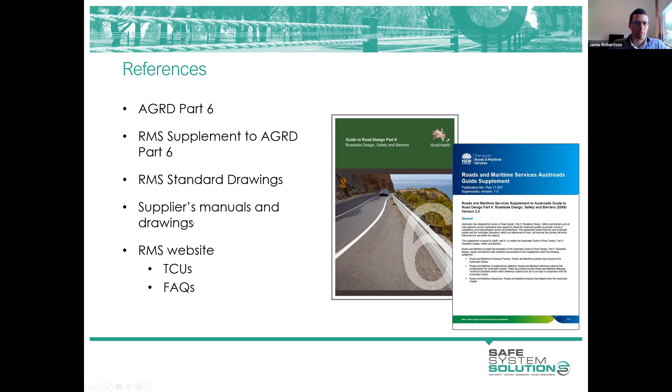Before we start designing a barrier, we really want to think about what is it intended to do? That really narrows down the suite of products that we have to choose from. Is it at the roadside or in a median where we're interested in preventing head-on crashes, at a bridge perhaps, or maybe it's at a work site where we're primarily concerned about the safety of the workers behind rather than the occupants of those errant vehicles.

On a windy motorcycle friendly route, you might see a barrier like this with some motorcycle add-ons, and Ken will talk to you about these type of things in a little while. You might see a wire rope barrier at the roadside, as you can see there.

In the median, we need a barrier that can be struck safely from both sides, so wire rope is a popular choice. You might have a back-to-back guard fence installation there. We have a G4 or similar - it might be a flexible W-beam back-to-back system.

On a high volume, high speed road with a lot of trucks like this urban freeway, we might use concrete. Now, it's the least forgiving system we have, but in a relatively constrained environment like this, where impact angles are likely to be low, it's a good option. And we really are concerned about what might happen if a larger vehicle did penetrate a median barrier due to the high volumes at this location.

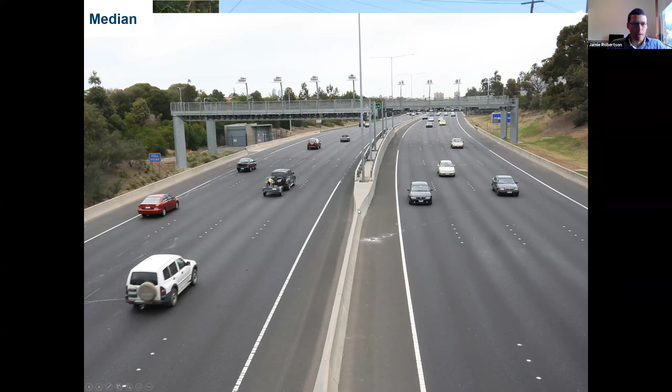So what is our barrier doing? What's its purpose? That helps us make some decisions around the product that we choose. And Evan took you through the list of accepted products last module, and it is constantly evolving - it's undergone quite some change in the last little while with the transition to MASH.

With our longitudinal barriers, we class them as rigid, semi-rigid, or flexible. Every barrier has an end treatment. It might be an end terminal, like a guard fence end treatment. It might be a crash cushion or impact attenuator that we might use at the end of a concrete barrier, for instance, or a bridge pier. We might have a point protector, like the Raptor crash cushion that we've seen, particularly useful in highly constrained locations where we don't have the space for a longitudinal system.

Our installation might be permanent or temporary, so we have products classified as permanent and others classified as temporary. Any installation might be of a permanent nature or a temporary nature. So it is even sometimes the case that we might use a permanent barrier in a temporary situation. We might have a temporary transition or traffic switch as part of some roadworks that's going to be in place for a year or two. So it's a temporary situation, I suppose, but we sometimes make the decision to use permanent systems.

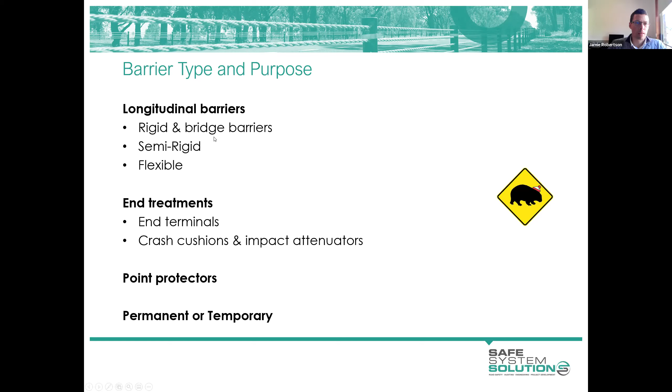Rigid barriers are the least forgiving system in terms of risk to vehicle occupants. You can see there some examples on bridges where we've got concrete barriers. We are concerned about what will happen if a heavy vehicle does penetrate that barrier and ends up below, perhaps on a roadway, a rail line, or in a stream. So the secondary consequence is often of greater concern than that single vehicle run-off road crash.

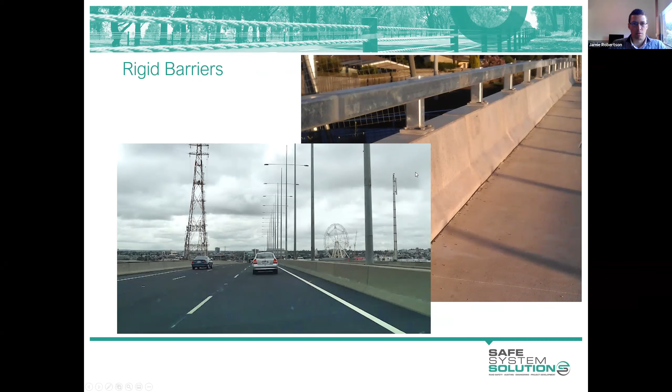They deflect by very little, next to none. They're massive lumps of concrete, often anchored to a structure, so they deflect by next to nothing. As a result, they don't incur much damage when struck. That's a good and bad thing.

It's great in terms of maintenance. They rarely require maintenance intervention, and therefore their ongoing cost is low. But if and when they are struck by smaller vehicles, there is a greater risk of injury to those vehicle occupants. Because of that, we need to be mindful of where we locate rigid barriers, not at locations where we might expect an impact at a relatively high angle. So perhaps off the back of a curve, we need to be conscious of the distance from the edge of the road that a rigid barrier might be located.

So as we're not opening up that possibility for larger impact angles. Another benefit is that they can and do contain larger vehicles, and they can be engineered to contain as large a vehicle as you would like.

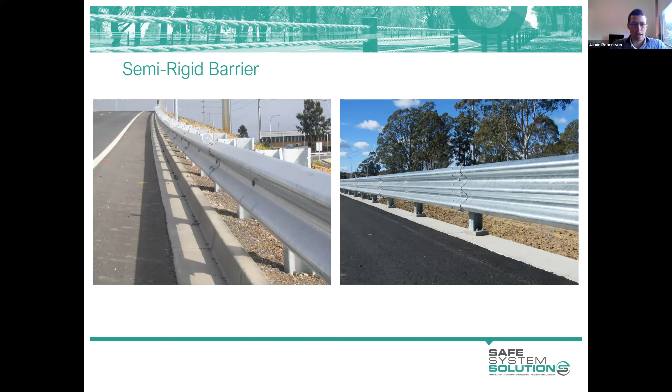Stepping down in terms of rigidity, we have the semi-rigid category. G4 on the left, Thrie-beam on the right. Now I'll note that both G4 and the public domain Thrie-beam products are now legacy. There are some proprietary Thrie-beam products that are accepted for use.

Semi-rigid systems deflect by a relatively small amount. Because of that deflection, they have some sort of cushioning effect on the occupants of the errant vehicle, so they're more forgiving than rigid systems in that regard. They usually remain serviceable after an impact. They will incur some damage, but not enough that they are rendered ineffective for a subsequent impact. You can transition a semi-rigid barrier directly to a rigid system, so that's a great thing on a bridge approach.

They are more easily applied in constrained locations, particularly in comparison to wire rope systems. They can be curved relatively tightly. Their minimum length requirements are less prohibitive than some other systems.

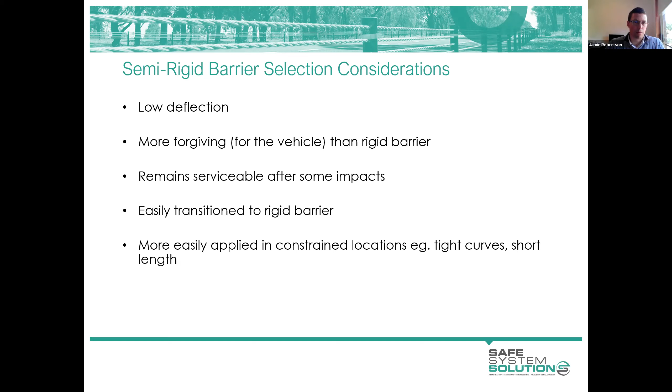The newer cousin of wire rope is the flexible W-beam barrier, which at first glance looks very similar to a semi-rigid barrier, but the notable difference is that there isn't a block between the post and the rail. And of course our posts are relatively weak, so the system performs largely by the tension developed in the system rather than the resistance provided by the posts.

Flexible systems deflect by a fair amount. As a result, they are forgiving on the occupants of the errant vehicles. Wire rope is the best in that regard, but the flexible W-beam systems aren't far behind. The barrier may be rendered ineffective by a single impact, and that particularly applies to wire rope systems. A significant length of barrier can be damaged when a wire rope is struck.

You might be talking in the order of 50, 80 metres, something like that. The cables will lose tension, perhaps even be lying on the ground. So we can't be sure, or it's even unlikely, that another impact in the same location the vehicle would be contained. Wire rope is difficult to apply in constrained situations, horizontal curves, or short lengths between driveways, for instance.

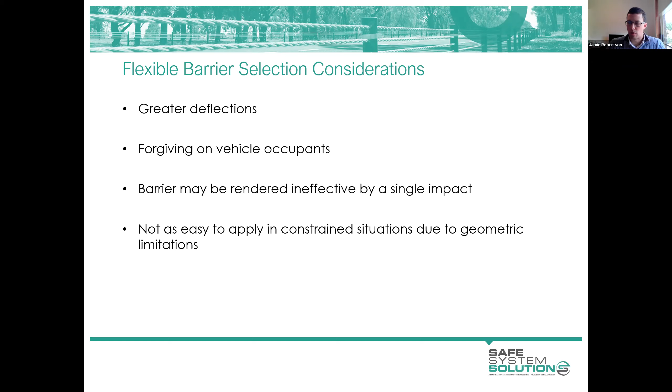And a few quotes here from some of the relevant guides around design and choice of barrier systems. Part 6 does say that a barrier should only be installed when the barrier reduces the risk associated with the roadside. Comments along those lines used to be a much bigger feature of that part. It's generally now accepted that a barrier, and particularly a flexible one, provides a better safety outcome than not providing one. That said, there are some design things that we need to do to ensure that we don't introduce a risk to road users when we install a barrier.

AASHTO talks about whole of life cost, and that the best solution is the one with the lowest whole of life cost.

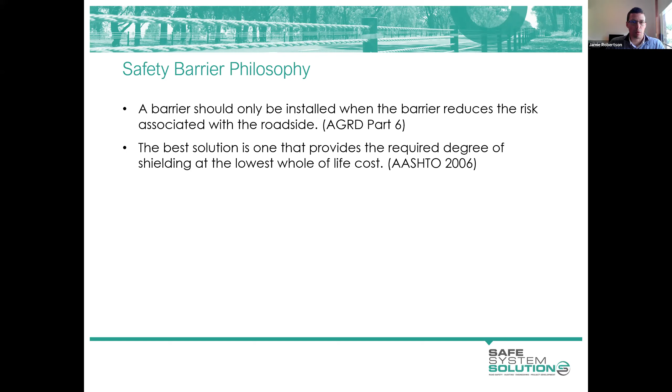There's been a lot of work done in Victoria around comparing the different flexible systems in terms of whole of life cost, and that is one big attraction of the flexible W-beam products over wire rope, because they don't require that maintenance intervention every time they're struck.

The general philosophy is to accept the most flexible system you can, subject to the constraints at the site. So there the hierarchy would be wire rope, then your flexible W-beam products, semi-rigid and rigid.

When you're thinking about the decision to install a barrier and your barrier type, there are a few key things to keep in mind. Think about the speeds at your site. That will influence whether you need a barrier at all.

We know in high-speed environments that the entire roadside area is of interest, and there is benefit in shielding roadsides continuously, even where there are no fixed hazards present. In a lower speed environment, a barrier may not be required or provide any great safety benefit.

What is the consequence of barrier penetration? Is our worst case scenario just that single vehicle run-off road crash, or is there a secondary consequence that we need to be aware of? And if there is, this is where we typically beef up our containment level and go with a more rigid system.

And know the ins and outs, the pros and cons of the different systems, the different categories of systems, and even the individual products within those categories to help you make informed choices.

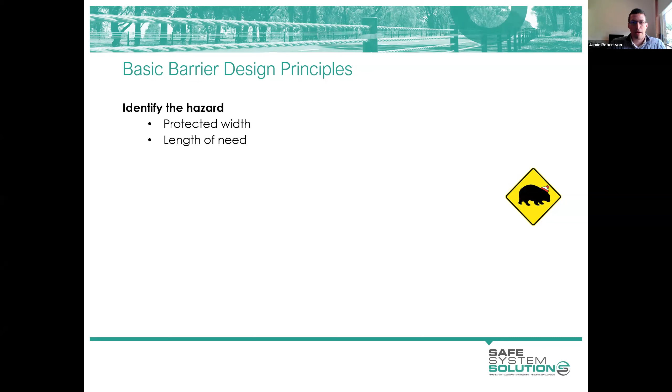Length of need is the term that we use to describe how long a barrier needs to be to shield a particular hazard.

We need to locate our barrier in relation to the edge of the road. We need to be mindful of our traffic lane arrangement, our existing and desirable shoulder widths and verge widths. Is there a kerb in play that might influence the lateral offset of our barrier from the edge of the road?

Is our batter one that warrants shielding in its own right? Is it flat enough that we can install the barrier on that batter? We need to think about run out areas, and I'll explain that concept a little later. That might influence where we start and end a particular barrier.

And we need to think about how we might transition to other barrier types. There might be existing barriers on a site that we need to match up to, or other barriers of a different type proposed as part of the same project. It might be that we have a structure that warrants a high containment level barrier, and we need to either connect directly to that barrier or overlap in some way.

So it's often the case that we'll go into a barrier design with a preference for a system. And I do encourage you to think flexible first, but through experience, you'll identify that flexible systems are often difficult to achieve. So it's quite an iterative process.

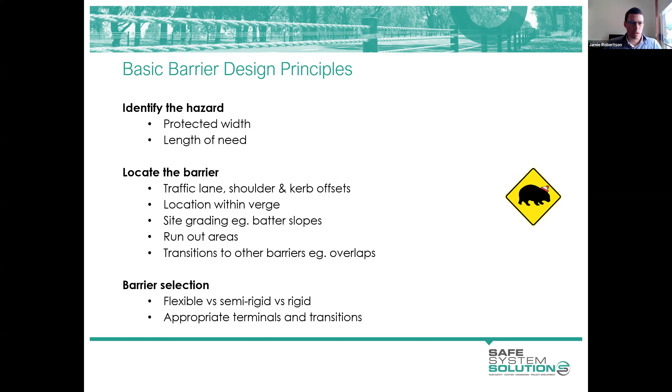There are two distinct scenarios in barrier design. The first is a new roadworks project, a new piece of road, or a roadway where there's some other works happening, and we have the benefit, therefore, of survey and other design information.

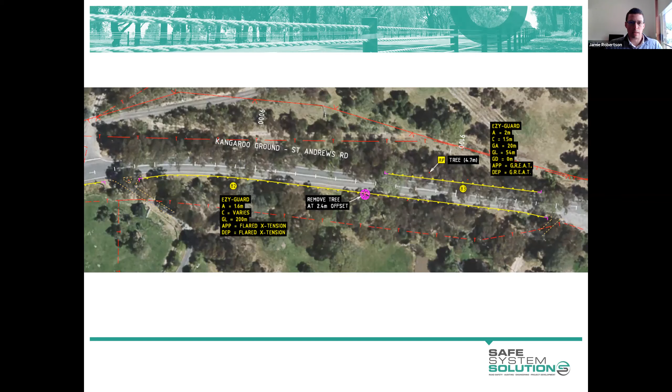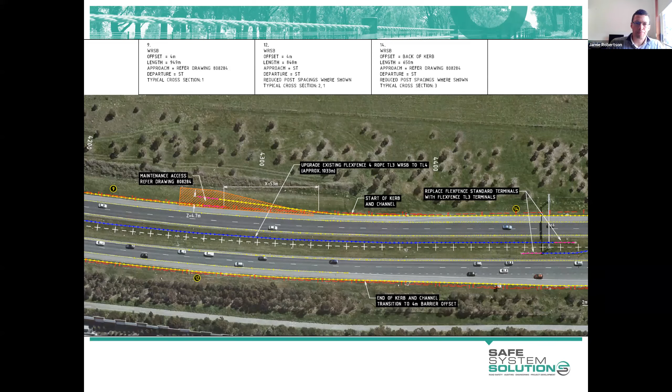Speeds influence our length of need. We typically find that at higher speeds, vehicles will depart the road, or may depart the road, at particularly shallow angles and reach hazards located a long way from the road. Flaring of barriers can influence their length of need, as can the road geometry - we treat straights and curved sections differently.

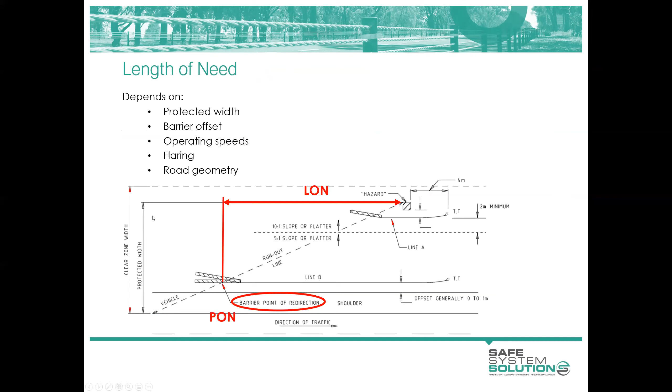All right, so here we have our vehicle run-out line, which on a straight piece of road, we construct at a particular angle from the direction of traffic. Our angle here is to be taken from the Austroads guide. We choose the appropriate angle of departure based on our speeds.

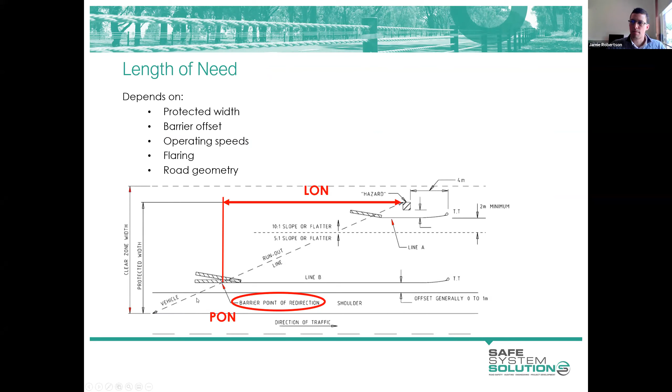In states that don't use the angle of departure method, the question always comes up: what's the magic angle? There is none—we have to explain this complicated run-out length method. So I do like the angle of departure method. It does, however, result in some particularly long lengths of barrier.

And I'll point out as well, it does result in a barrier that provides just as much length for the opposing direction as it does for the adjacent direction, as opposed to other methods which result in relatively short lengths on that opposing side. So despite what this drawing looks like, it looks like we have different angles here and here—these angles are the same, and your barrier is basically a mirror image on the approach and departure sides.

This is for a two-way situation on a straight road. If we had a one-way roadway, we need to provide that same length of need for the adjacent direction. But at the departure end of the barrier, the typical situation would be to locate your point of need around about here, in line with the end of the hazard.

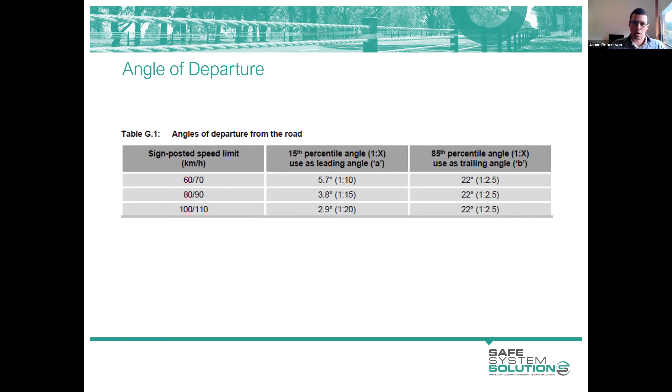So that's this trailing angle column that we can find in the Austroads guide. 22 degrees is the angle we can use to determine where our trailing point of need can be located.

On curved sections of roadway, we do things a little differently. Instead of constructing that line—perhaps I better qualify this—in most jurisdictions, it is the case that we would construct a tangential run-out line, continuing a line on the tangent to the curve and projecting that to the back of the hazard. However, in New South Wales, I believe we continue to use that additional angle of departure, our 2.9 degrees, in a high-speed environment. And that's how we arrive at our barrier lengths.

That is a difficult thing to determine on site. If you're doing a design in CAD, you can construct those lines on the screen and work things out, but to do that on site is quite the difficult thing.

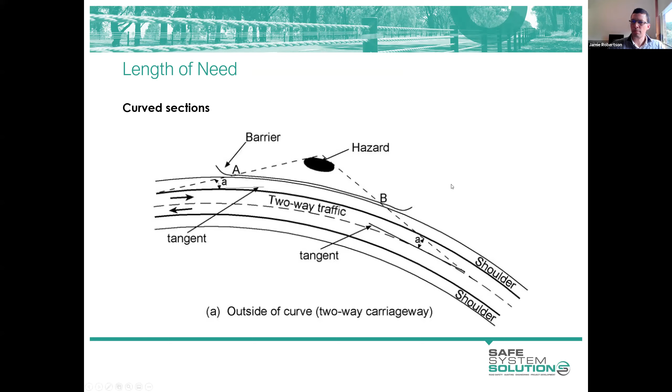Now, we've talked about how long our barrier needs to be. Our barrier offset is how far from the edge of the road that barrier should be. This does influence our length, so again, it is an iterative process. Our barrier offset and length of need are interdependent.

The Austroads guide provides some limited guidance on where we should locate barriers in relation to the road. It talks about 3 metres being a minimum requirement. We do, of course, install barriers on occasions at lesser offsets than 3 metres.

The general consensus between the jurisdictions is that 4 metres is a good offset to achieve. That provides enough space for a vehicle to stop at the side of the road when it has to, for example if it's broken down in an emergency. 4 metres allows the vehicle to do that and the occupants to open the door. It also allows maintenance vehicles, tow trucks and so on to pull up at the side of the road and do what they need to do.

We do need to limit our barrier offsets so we don't locate them so far from the road that we open up the possibility of rollover, or of vehicles striking those barriers at excessive angles, resulting in greater occupant impact severity and greater potential for the barrier not to perform, because they're being struck at angles beyond the crash tested combinations.

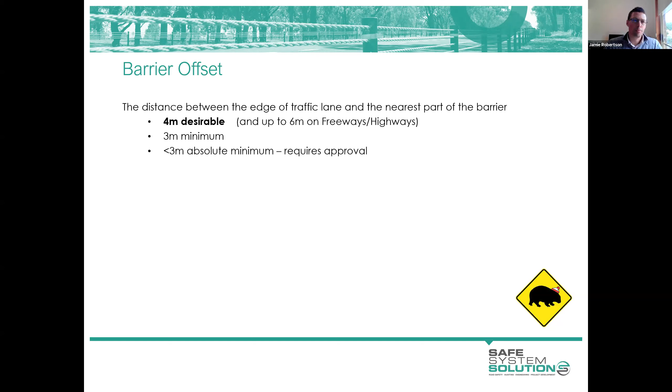There are lots of things that feed into your choice of barrier offset. Is there a curb? Where is our hinge point - the point at which our formation tips over, the change from our verge to our batter? Different barrier systems have different requirements in terms of their offset to hinge points, and those requirements are about providing enough lateral support to the barrier system and its posts, and also containing deflection.

It is desirable to contain the full dynamic deflection of the barrier system within the verge, but especially in retrofits, that's rarely achieved. It would require a hell of a lot of earthworks, or compromise your barrier offset to the point where the barrier is located really close to the road. So there are some trade-offs made in that respect.

There's a little formula, Dmax minus 1.3 metres, where Dmax is the deflection of a wire rope. If you know how much your barrier might deflect and subtract 1.3 metres from it, that ensures one set of wheels of the impacting vehicle, the inner set, will remain on the verge. The outer wheels may travel out into mid-air beyond the hinge point, but the other set will be on solid ground, and the likelihood is that the vehicle will be redirected.

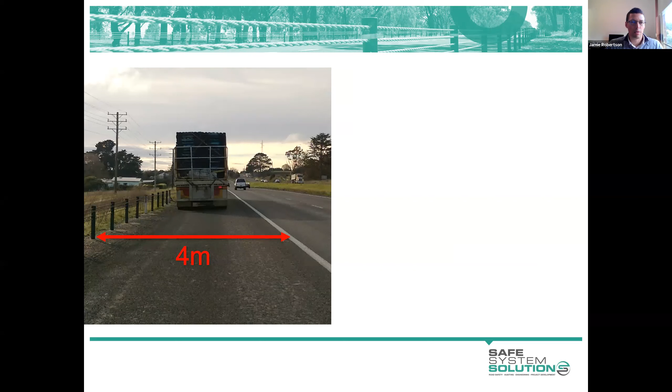So there's a school of thought that we should avoid offsets in this sort of range, around about the width of a vehicle. Perhaps 1.6 metres through to 2.5 metres is one range that gets bandied about. Some people think you should avoid offsets in that range because it appears to be wide enough for a vehicle to stop and shelter, but in fact it's not really.

Now, the risk increases with the length of barrier at an offset in that order. If that was a relatively short installation, perhaps no big deal. If it was a continuous length of half a kilometre or more at that same offset, more of an issue.

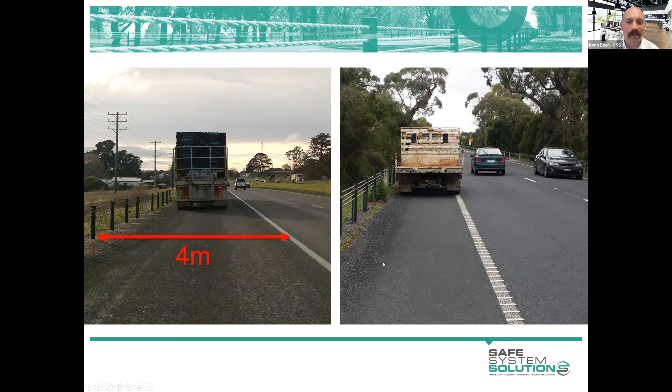There's a barrier at basically a 0 offset from the edge of the road. The roadway drops away pretty quickly, and there are hazards quite close to the edge of the road. So perhaps there wasn't an opportunity to locate that barrier much further from the road than it is, but this particular barrier is subject to very frequent nuisance impacts. And because it's a wire rope, that means the barrier may well be ineffective next time it's struck in that area - posts are knocked down, cable tension is lost. So I'd suggest that the choice of system here was not the best. A guard fence product would have been preferable.

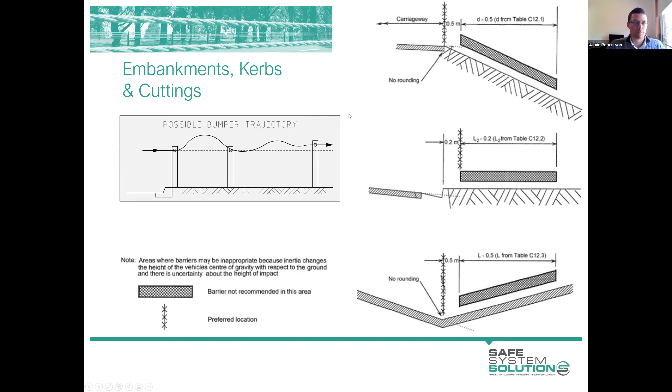The preferred batter hinge point offset differs between different systems. For guard fence products, we can typically get fairly close to the hinge point. For a semi-rigid or flexible guard fence product, we can get as close as 500 mil, or in the case of some flexible guard fence products, less than that.

Some products have been tested as close as 300 mil from the hinge point. Where we do get close to hinge points, consider installing longer posts, especially where the batter beyond the hinge point is steep. Proprietary products and public domain systems have longer post options that can be used. In the case of wire rope, which deflects more, and where we have concrete footings, we typically need a greater offset from the hinge point, typically at least 1 metre, and desirably the full dynamic deflection, which might be 3 metres or so. So it's not commonly provided, although it's desirable to do so.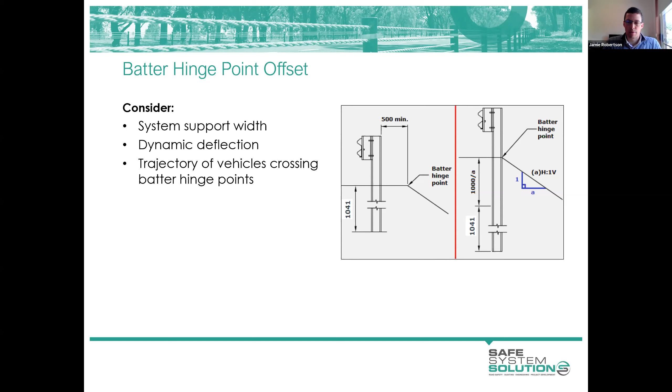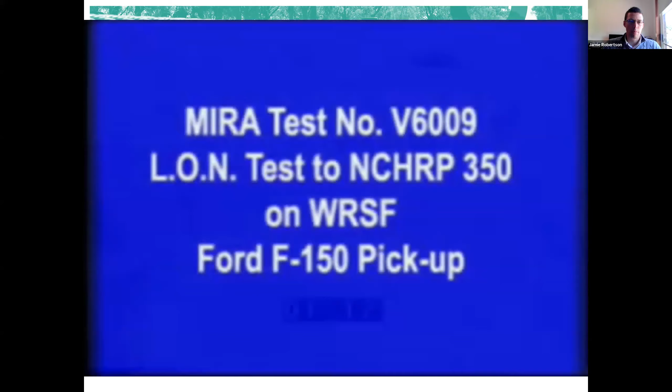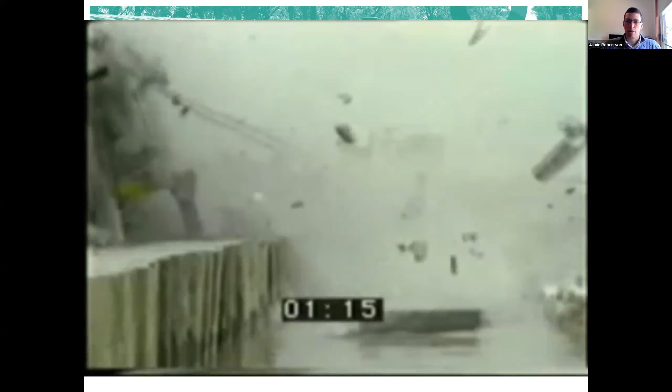Little video here demonstrates that barriers can and do work when they're located close to hinge points, provided the system is given enough lateral support to the posts. I'll play that one more time. You can see there a wire rope located very close to that vertical drop. The vehicle's struck it at speed, and it's been captured and redirected because that one set of wheels, the inner set of wheels, remained on solid ground.

Allowable batter slopes. There are slopes that present hazards in their own right, so anything steeper than 4 to 1 is a hazard we should consider shielding. Any batter no steeper than 10 to 1, so that's really quite flat, is suitable for a barrier to be installed anywhere along it.

In a retrofit situation, we might consider installing a barrier on a batter in the order of 5 to 1 or 6 to 1. This snip from the Austroads guide shows a barrier located at the base or beyond the base of a 5 to 1 batter, and suggests that if you've got a slope of that steepness, you should locate your barrier beyond it and put a relatively flat pad of 10 to 1 in front.

This is not something that should be encouraged. It would be preferable to locate the barrier at the top here on the verge, and if we can't get a desirable offset there, we might need to do some earthworks to get our 3 metre offset. Locating the barrier down here really does open up the opportunity for vehicle rollover.

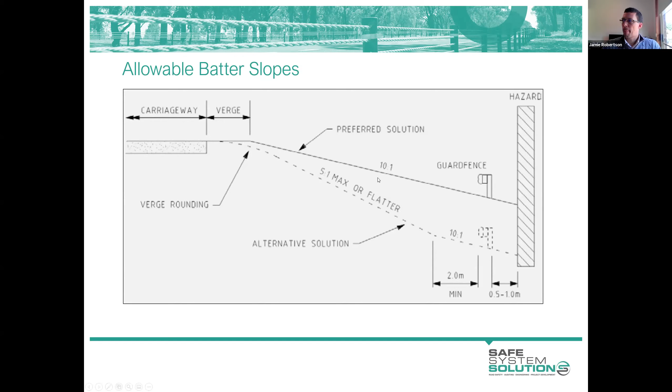Another video. This vehicle was obviously not contained and redirected.

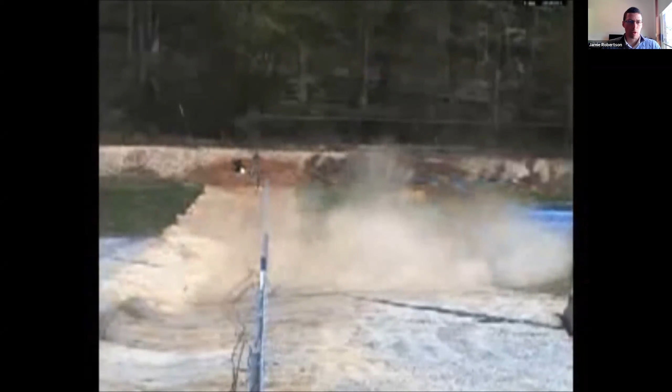Why was it so? This angle tells the story. You can see that wire rope located just beyond the invert of the table drain, and I'll play it again.

The vehicle has gone down the side of the embankment and nosed under the barrier. As it hit the invert of the drain, the suspension kicked in, the bumper height at that front corner went down, and it penetrated straight through the barrier with a fair bit of speed still. So the moral there is to avoid any interaction between barriers and changes in slope.

Barrier deflection. How much is our barrier going to move upon impact by an errant vehicle? Evan stepped you through the different crash testing, or MASH crash testing protocol, and the different test levels. As a result of the crash testing process, there are published deflection values for each system.

Rigid barriers, we know, deflect by next to nothing. Guard fence, applying to your public domain G4, which is now a legacy product, and also your Thrie-Beam products, will deflect by about 1 metre. You can stiffen them up further by closing up the post spacings and get that deflection down to about 0.5 metre.

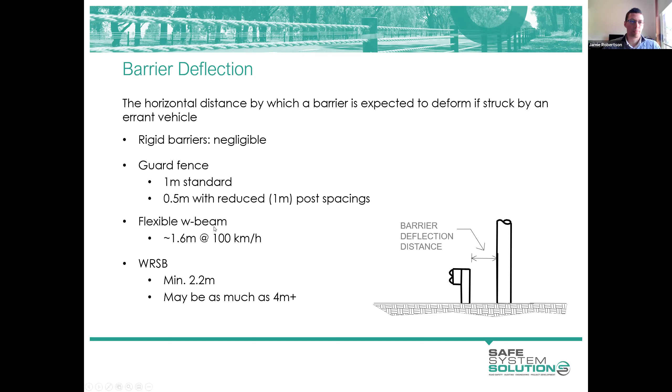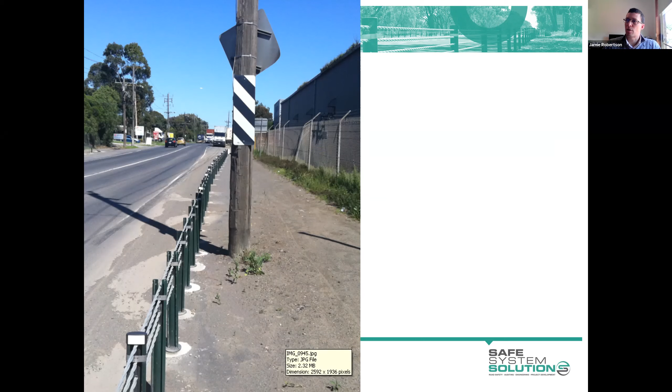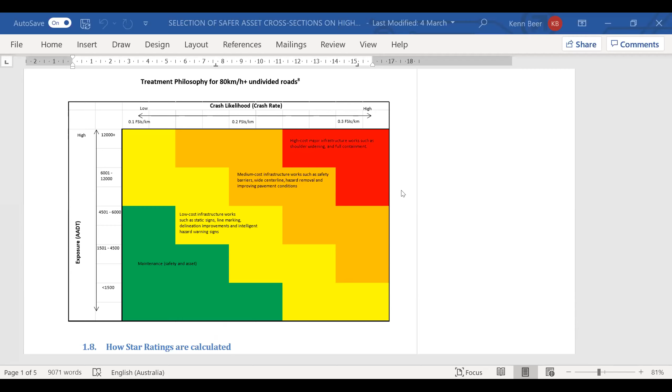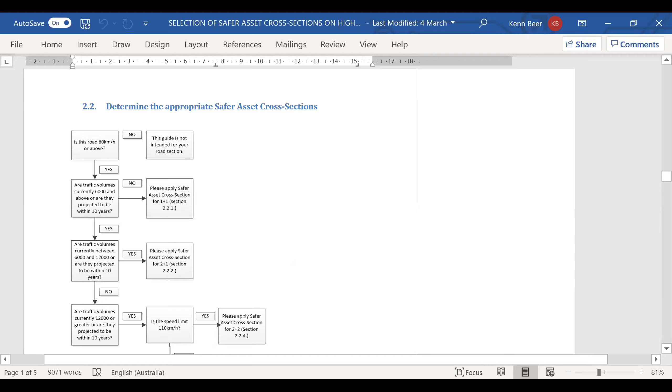But then this document goes into a bit more detail, giving you some determining the safest cross-section flow diagrams essentially, and you can look there at different volumes and look for the corresponding cross sections that you have as an aspirational cross section. You may not be able to get it throughout that whole route, but then you start to see these sorts of tables with some information around the cross section features, the seal width, and what would be expected. And then you can sort of see the indicative star rating.

Now, there's a bit more involved in getting an actual star rating to it. We do star rating of roads, but this is a pretty good indication of where you'd be expecting to get with a star rating. So I'm not going to go through this whole document, and as I said, this one's probably a little bit out of date, so it'd be worth following up with the Centre for Road Safety there for the selection of safer asset cross sections on high-speed roads document. Hopefully that helps some people out, because there are quite a few intricate decisions to be made, and a bit of guidance is helpful.

So the next step in the design process is to think about our minimum length requirements. We need to check that regardless of the length of need we've determined, we're satisfying the minimum length requirements of the barrier system we have in mind. You might be surprised to see what some of those minimum lengths are, and they have increased with the shift to the MASH protocol.

For wire rope products, these numbers are spelt out in the product acceptance sheets and are based on the crash tested configuration. For wire ropes, those numbers are 164 to 188 metres, so they're really quite long. The flexible W-beam products are quite a bit shorter, but still not very short, and can be difficult to achieve in some constrained locations where you've got lots of driveways and this type of thing.

W-beam products like a G4, you could get away with a relatively short length, say 10 metres between terminals, and those terminals might be a 15-metre approach terminal and a 4-metre trailing terminal on the other end. So a minimum installation length of as little as 30 metres or so. These numbers are all given in the product acceptance sheets.

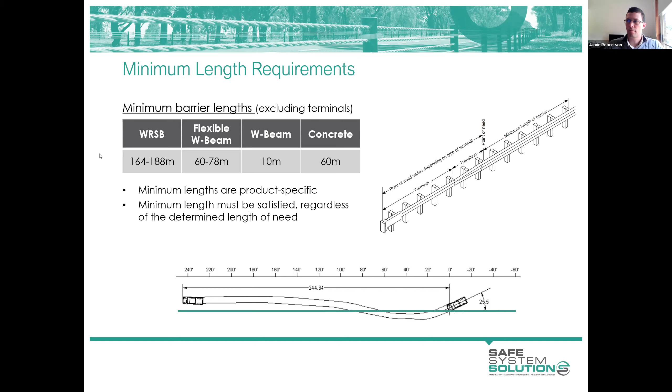The desirable thing here would be to think about the location of the hazard at the roadside, which might be the waterway or the drop. How far is that from the edge of the road? Work back from that to ensure your barrier cuts off your run-out line, to provide a length of need.

Also on the departure end, because this is a two-way roadway, we shouldn't be installing that trailing terminal. That's a hazard if struck end on. Perhaps the defence was that this was installed outside the clear zone for the opposing direction of travel, but we're going away from the clear zones, and it's always preferable to install an energy absorbing terminal where there's a possibility it might be struck end on.

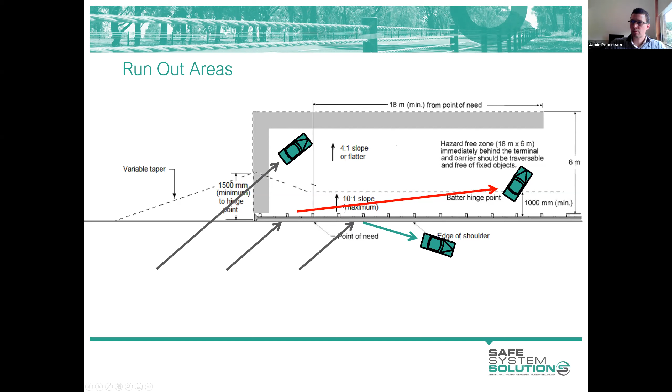Wire rope terminals are in the order of 12 metres long, and that entire length is considered gating or not redirective. So you need to find or have available an extra 12 metres or thereabouts of space for a wire rope terminal to ensure that the barrier will adequately shield anything behind it. That can count against wire rope systems.

Guard fence terminals, on the other hand, have their point of redirection partway along the terminal, nearer to the anchor point than the far end, typically about 4.5 or 5 metres from the anchor point. So you've got 4 or 5 metres of gating terminal as opposed to 12.

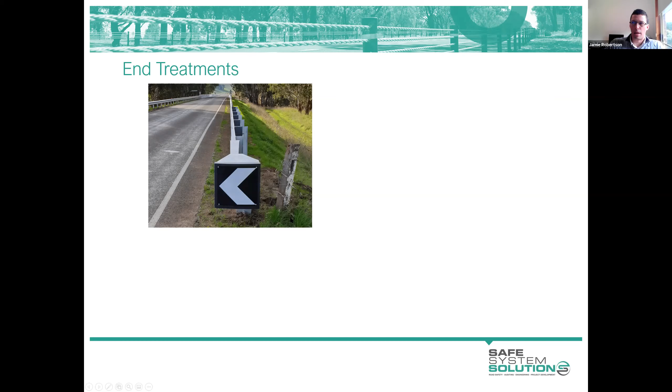When they're struck, they're intended to end up like this. This terminal, with its extruder head, has spat the rail out to the side, bringing the vehicle to a stop over a distance of up to about 15 metres. That's what it looks like from another angle.

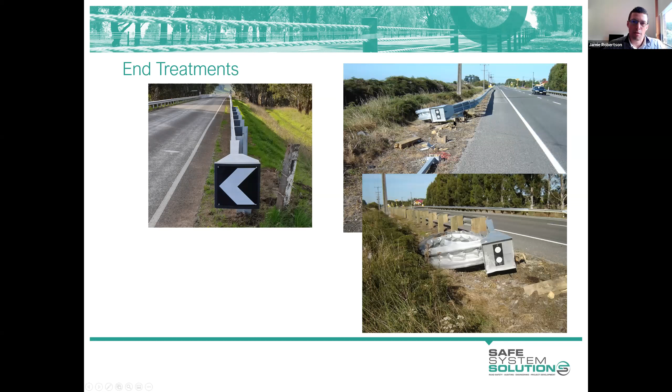Some of the RMS standard drawings deal with barrier transitions and how to provide overlaps, particularly between wire rope and guard fence systems. The preference is to overlap those points of need by at least 1 metre, so that there is not that opportunity for an errant vehicle to pass through the gap.

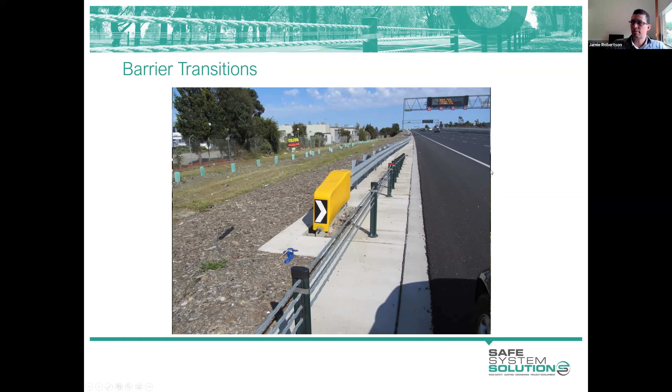At concrete barriers, we can transition a W-beam to concrete directly. In New South Wales, the standard arrangement is to use a thri-beam, but the principle is to gradually transition the stiffness of the barrier from the semi-rigid system to the rigid concrete. In the image here, you can see that's been achieved by closing up post spacings to 1 metre and then 0.5 metre. There's actually a double nested rail to further stiffen things up for this connection. So we can have direct connections between semi-rigid and rigid systems.

There are no direct connections to wire rope products. In New South Wales, I think it's thri-beam there, isn't it? That connection? Yeah, that's right. So there is a standard detail for that thri-beam connection in one of the RMS drawings.

So a few parting tips. If you're designing, know the ins and outs of your chosen barrier system. And don't go into a design with the blinkers on. Keep an open mind. You may well find that because of constraints at your site, you can't get the system that you might want. There are lots of trade-offs in design. You're balancing hazard offset from the road, accounting for deflection, desirably working within the existing formation, but maybe needing to do earthworks, lots of things to weigh up.

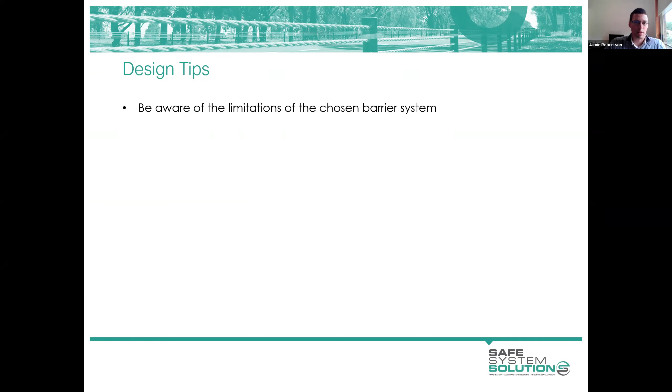We've seen the minimum length requirements for different barrier systems. They are really quite long. So if you see a barrier that looks quite short, chances are it certainly doesn't meet those requirements.

We should avoid short breaks in barrier wherever we can. The terminals are the most hazardous and the most expensive part of a barrier system, even though they are crash tested and accepted to MASH standards. There is potential for injury to vehicle occupants. So if we can minimise the number of terminals, we're providing a safer outcome.

You may well find as well that instead of providing successive lengths of barrier, it might be a cheaper option to link them up and only need 2 terminals instead of 8 perhaps. Even though you've got a longer length of overall barrier, it may well be a cheaper solution because those proprietary terminals are quite expensive.

Flaring of barriers is something that should be done more, especially where our offset isn't what it should be. So if you're dealing with a barrier offset of, say, less than 3 meters, I encourage you to flare the terminal away from the road so it's located more than 3 meters. That has benefits in terms of shy effects. It can open up sight lines if your terminal is located near a driveway. Lots of benefits to flaring barriers.

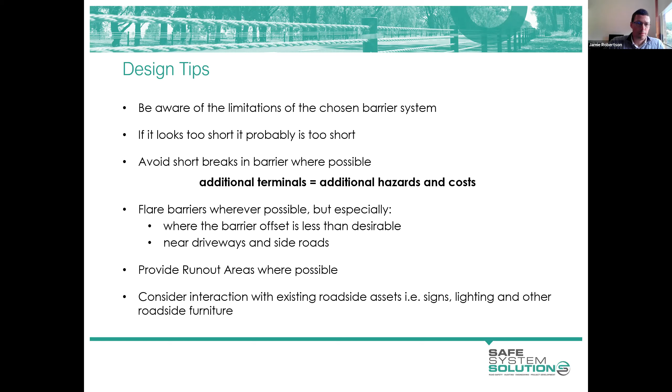There is a list of things, as long as your arm, that you need to be mindful of when you're doing a barrier design, and it very much is a site-by-site situation. If there are bridges and culverts that you need to work around, identify that early. If by chance you need to provide a structural solution at a bridge, that's something that will be a time-consuming part of the process, and you want to identify early. You might need a ground beam to be designed and constructed before you can bolt down your barrier posts.

If you've got culverts, you might want to fiddle your post spacings to straddle them. If there are motorcyclists, and Ken will talk about motorcycle treatment shortly, you might want to consider providing a barrier type that best suits that road user. Are there pedestrians that we need to provide for? Are there cyclists? If there are cyclists, that might influence our barrier offset. We might want to provide a width that's safe and comfortable for cyclists to ride. There are buses and bus stops and so on and so forth.

So I'll leave it at that, Ken, unless there are any questions. We will step through some tricky situations and examples of real-world situations on Wednesday, where a lot of these things will pop up. So happy to take questions now or defer them till Wednesday.

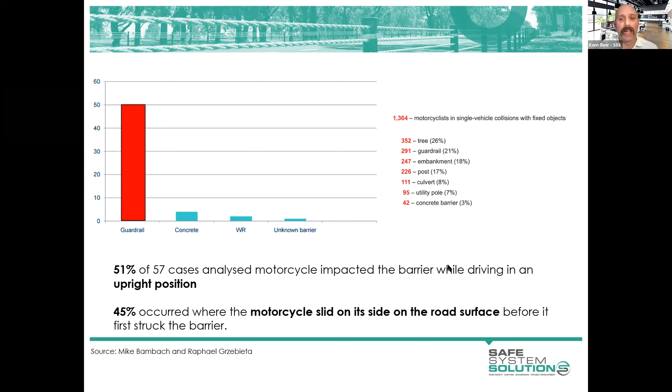And about the other half were still on the bike, trying to stay on the bike, and they hit the barrier and go over the top of it very quickly. So that's the kind of 50-50 split there. I'll come back and show you a few videos of how that plays out.

I hope you've been remembering to count your Wallies as we went. There were a few that popped into Jamie's, I noticed.

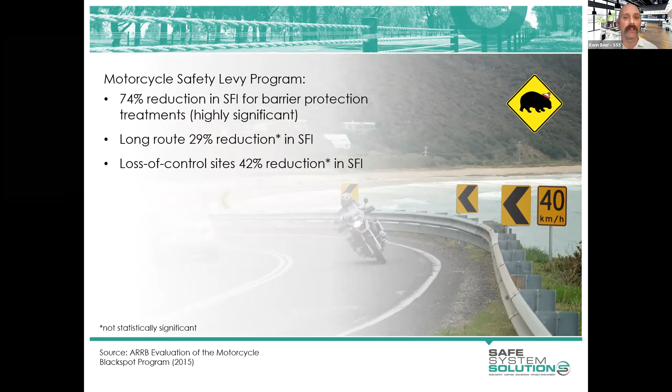We know that barrier protection, so underrun protection and the like, can have a pretty decent crash reduction based on programs that have been rolled out with just barrier protection and underrun protection. So we know we can get some good gains there. It's about thinking where you have higher percentages of motorcyclists. When a rider strikes a barrier system, the biggest source of death and serious injury is actually thorax. The head is certainly a challenge, but not as much as the thorax hit. So let me show you those two different crash types.

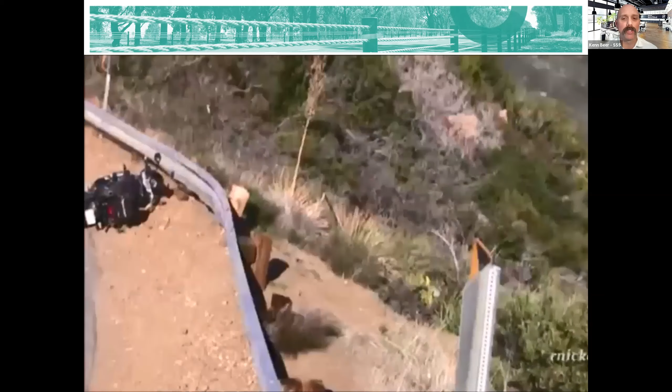Hopefully this will stream for you. So that one was a motorcyclist who's really almost off the bike, trying to gain control, and you can see they go over the barrier very quickly. That's what the physics does.

Here's a crash test where you'll see that happen. You can see the rider goes over the top. The bike does exactly what we want, runs along the barrier system, but what we're trying to protect has gone over the top. So that's about half of our barrier crashes, something in that sort of scenario.

The other half we see are riders that are off their bike, and they slide and then strike a post.

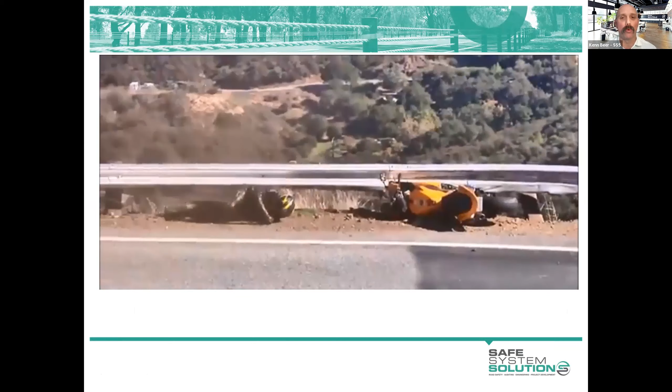Hopefully that's streamed through to you. I'll play it again. This one is what I call a low side crash, off the bike, slides and strikes a post. That one, nice low speed, friendly crash. But...

This one's again a crash test where we see a bike coming in with a rider at 60 km/h, and we see that the bike has enough energy to take out a post, but the post pretty much doesn't budge with the weight of the rider, and easily enough to kill the rider.

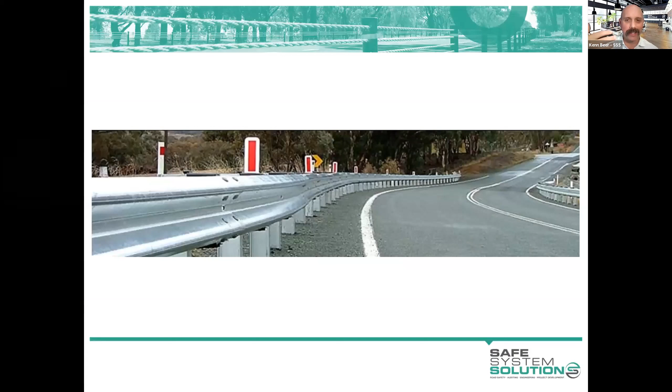So for the sliding one, at least, we've talked about it quite a bit already. We have different underrun protection devices available, and it's dependent on your barrier system, your proprietary product, as to exactly which one it is. So this one is the public domain one, which I'll talk about what New South Wales accepts for use these days, or what's legacy, and this would actually be a legacy product. But you can retrofit this.

You could see here, you could imagine sliding along there at 70 km/h. You've come off your bike, and to hit one of those posts would be an extremely severe event. Hitting this and sliding along it would be a less severe event. It would still be pretty violent, but much less severe.

So that's what we're trying to do with this underrun protection. As I said, you can retrofit it to existing systems, so that's a good thing. And you can see the little brackets that they've just started placing before they're putting the rails up there.

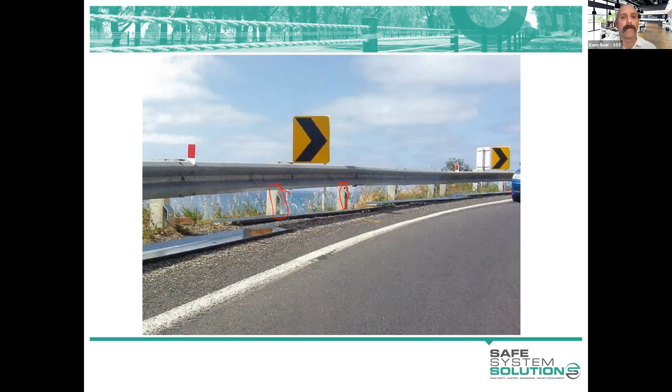So notice it's not on the end terminal, okay? And that's important because Jamie's talked to you about the specific functions of those end terminals, and Evan talked to you about testing. If we were to start adding stuff and bolting stuff to that, it would potentially change the way it functions altogether, and may present a danger to a passenger vehicle that comes and strikes that end terminal. So we certainly don't want to be attaching that.

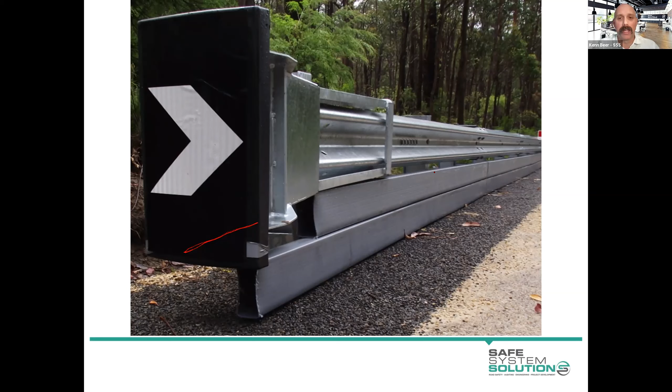Sometimes you get installers wanting to do that, and we certainly wouldn't do that. Now, there have been some trials in some other jurisdictions, not in New South Wales that I'm aware of yet, of a poly buffer system. This one is a plastic product that sits under the terminal, not connected to the terminal as such, and so it was deemed acceptable for the end terminal because when struck, it would be ejected out of the way. There's a bit more on an X350 there.

So the crash testing for motorcycles is a European test. It uses an 80 kilogram crash test dummy with some little modifications. They certainly don't like being used as motorcycle crash test dummies because it is a lot of energy.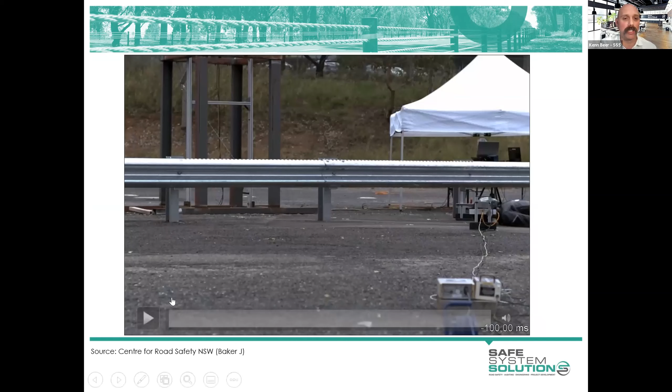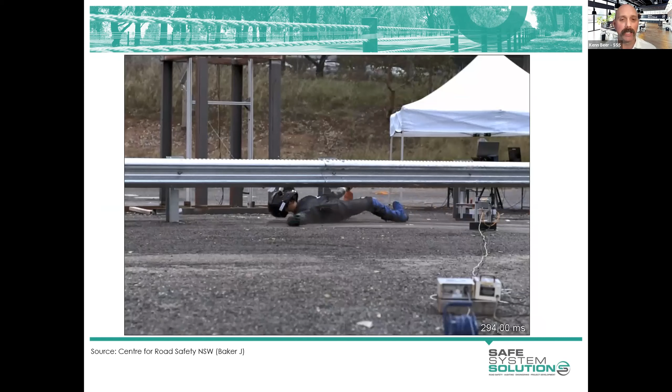Striking one of the posts. So I'll show some of the Transport for New South Wales Crash Lab crash test footage here for you. So here's a motorcyclist, 60 km/h, strike into a post, and you can see that pretty much writes off the dummy, and is certainly death levels of force put into that dummy.

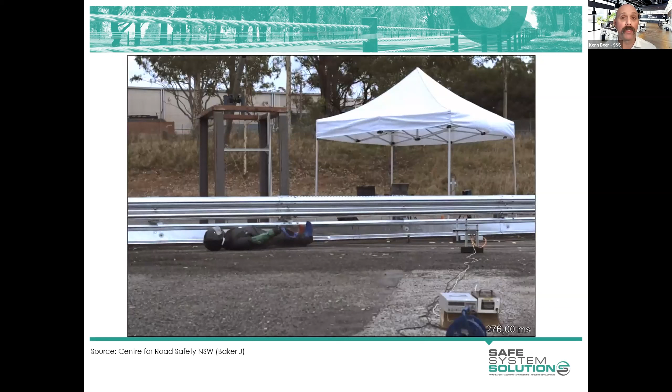So with the addition of an underrun protection system, we see that the dummy's energy is deflected along the system. There's absorption of the energy too, and that runs along the system and washes off speed over time, which is a big win. And that's what we like to see.

So we do know we've had some very successful designs there for that 60 km/h European test. So it is 60 kilometers per hour. We know that there's some higher speeds than that, which is a bit of a danger.

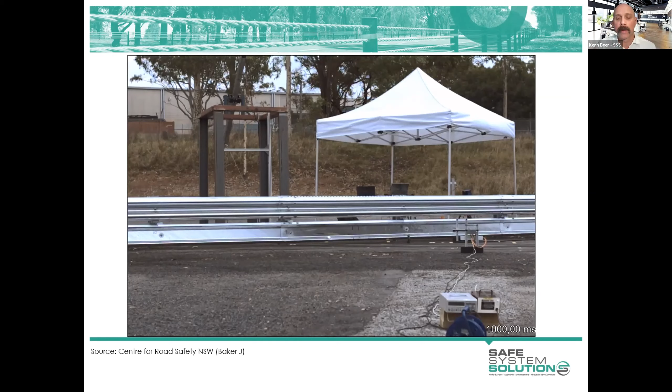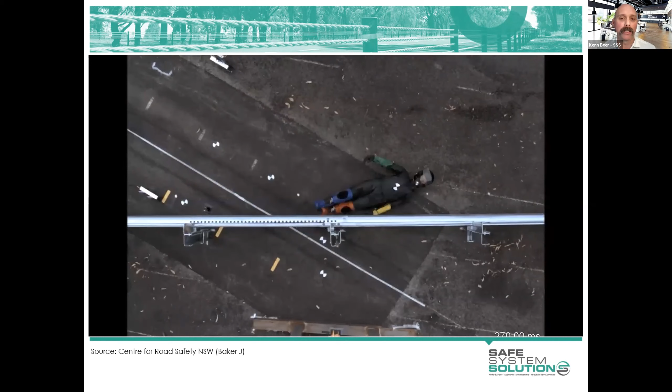So I think I've got some overhead views of that, so you can see, yeah, it is head straight. There's actually two tests that are done. One's directly at the post, one's directly between the posts, and interestingly, that between-the-post test with an underrun protection exhibits more force on the rider than the one directly at the post when you've got the rub rail there. I think it's something to do with the twisting of it back.

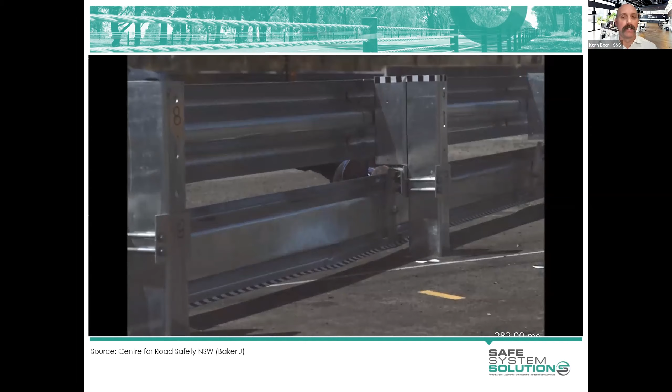There are then some attempts in different jurisdictions to try to address that over-the-top crash. We haven't done too well on that. There's different post cappings available, and I suggest you talk to suppliers if you're interested in post capping of one description or another, and just run that by Jade Hogan's team in their centre at Transport for New South Wales, just to check you're good to trial something like that.

And then we've got the wire rope systems, which motorcyclists, some of the motorcycle groups, will call the cheese cutter and somehow make out that it's the most dangerous thing there is for motorcyclists. Well, the research doesn't show that. The research shows that, like any of the barrier systems, if the motorcyclist hits the wires, they go over the top. And if they're sliding along the ground, they hit the posts, and the posts act pretty much the same as a flexible W-beam.

Where there is some truth to it is we probably don't have as good retrofit devices for motorcycle safety for wire rope systems. However, we don't put them in areas heavily populated with motorcyclists, like motorcycle touring routes and the like, because we cannot put that barrier on a curve radius smaller than 200 because of the tension, and posts would move into the road or away from the road based on that.

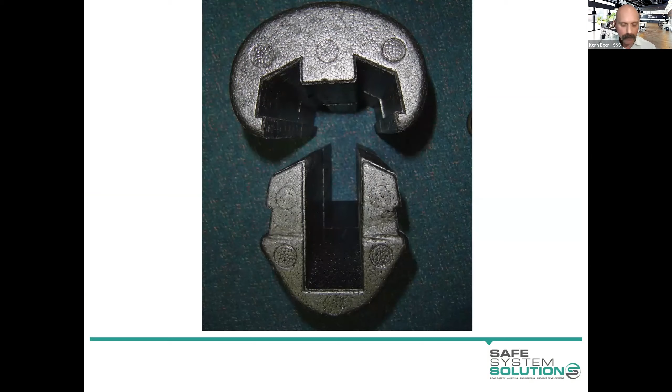So what some jurisdictions have been doing, and Victoria is one, is trying to put some sort of post padding, post protector in there - it's kind of like football goalpost padding. It's not as effective as some sort of underrun protection, but it is something.

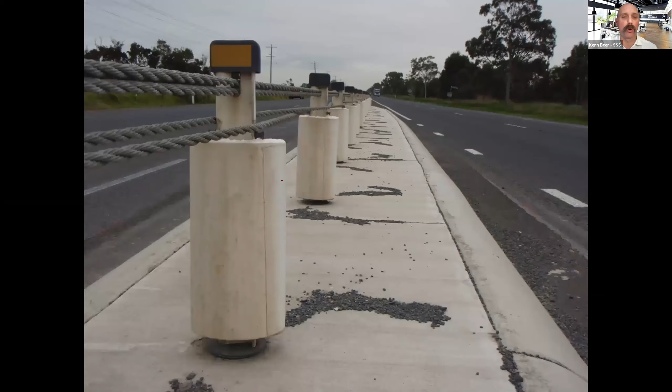So if you happened to have a site in New South Wales where you thought it was high risk for motorcyclists, or medium risk even, and it was a wire rope system, and you wanted to do something, you could investigate trialing some of these systems - they've been used in a variety of locations. There are different suppliers that offer those for their wire rope systems if you're down that track.

But take, for example, this road, which is the South Gippsland Highway. This would be a back-to-back flexible W-beam system with underrun protection now, for sure. If you're getting to the point where you've got enough motorcyclists that you are going to spend $45 per unit, I think the barrier system choice is the go, so you can get really good underrun protection.

And there's lots of different little products. Of course, we use a flexible delineator these days for any motorcyclist over the top that's not sliding along the system. And some dangers installation-wise.

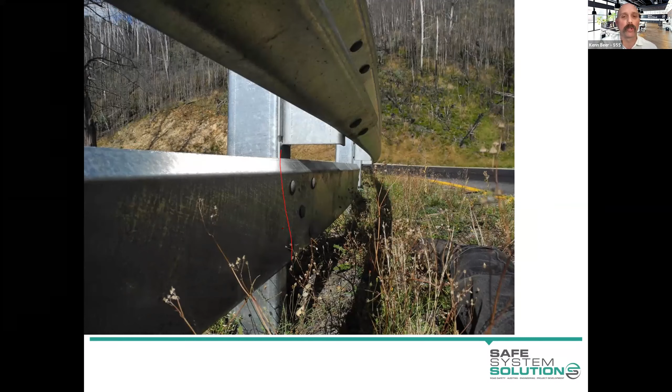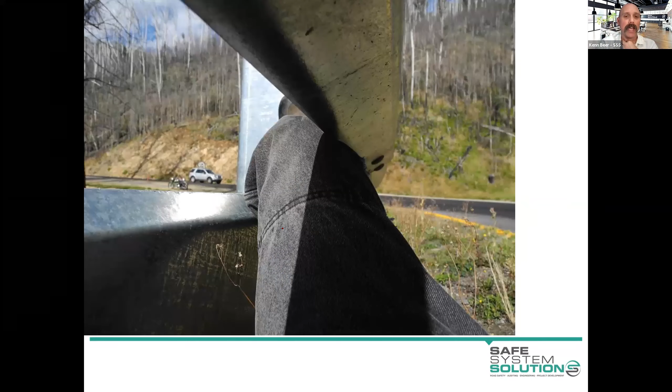Sometimes they install it right on the post - we lose a whole lot of the advantage for that cushioning. And we have gaps where a leg or an arm can get through there, and that's a big danger, because it's the post that'll do the damage. So just have a look at how they should be installed and make sure you do that, and try to close up these gaps - it's important.

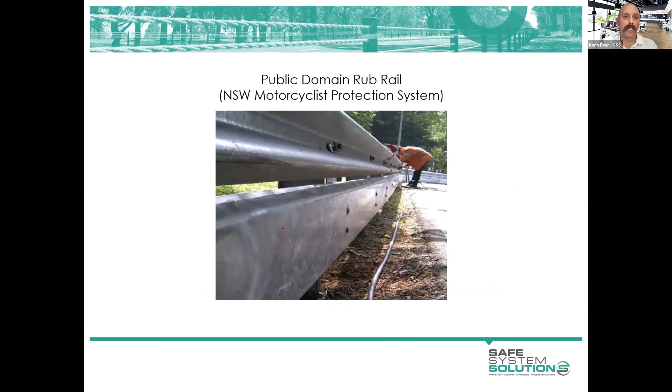So products accepted for use in New South Wales: Biker Shield, Hyasa Rail, MPR on EasyGuard Smart, and G4. And the legacy product is your public domain underrun protection system, which is a legacy product.

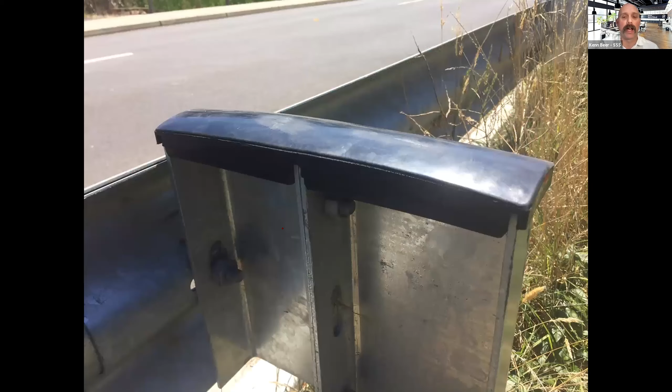BikerMate, Impact Protect - if you have a specific hazard and it's particularly concerning for motorcyclists, something to consider. So I should say I'm a licensed motorcyclist myself, though not an active motorcyclist. There's certainly a lot of dangers out there in riding, but I think there's a fair bit we can do with our barrier system choice and the addition of underrun protection and different products to get as safe an outcome as we can there.

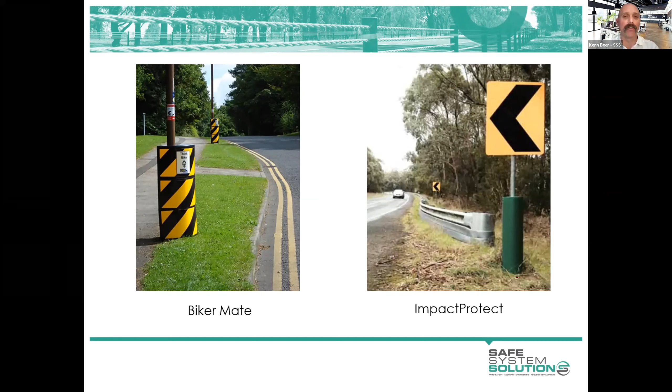So there were a few insights there, and certainly I'm happy to talk more if you have specific locations where you've got concerns and what could be done for motorcycle safety - happy to have a look at that. But that pretty much gets us to the end, and sorry, I ran a little bit a minute over.